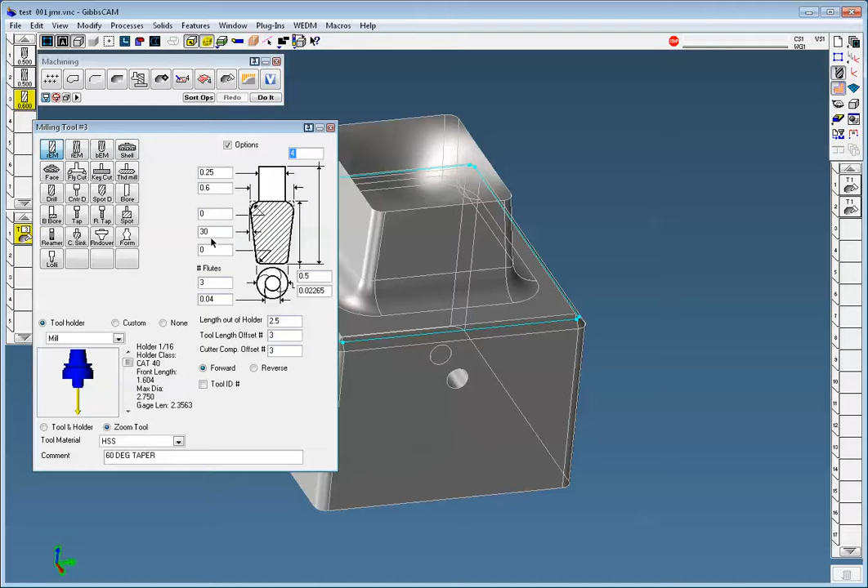What I want to do is use a chamfering tool to finish the chamfer around the lower portion without gouging the top. So to do that, I need a standard 60-degree chamfering tool with a shaft that's long enough to reach down into that part.

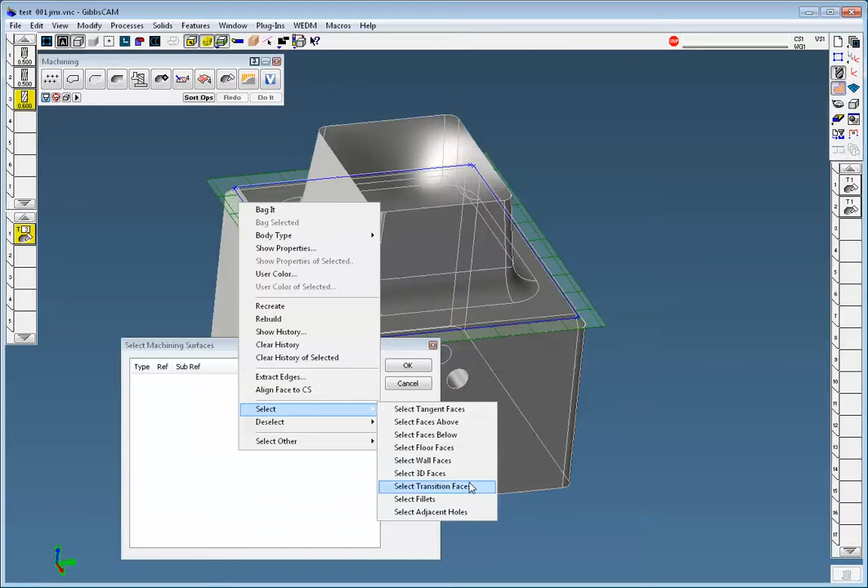So I'm going to open my process panel and say I want to swarf machine. And the surfaces I'm going to pick using our profiler. GibbsCAM's profiler allows us to select that profile, and select the faces with that profiler. I should select all profiles.

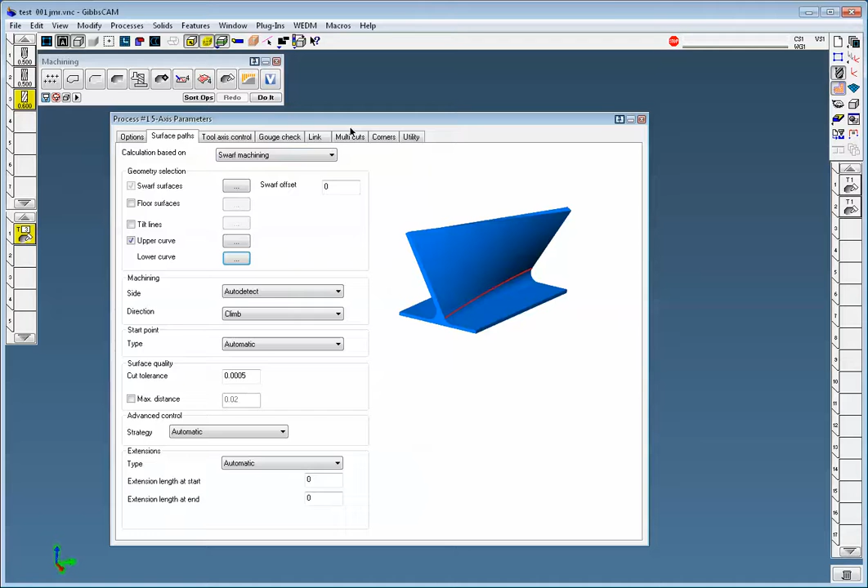Okay, so I have the swarf faces, and I want to machine to the upper curve, and I want to be aware of the lower curve of the chamfer. Once I have those set, assuming that I have my lead in and lead outs set up correctly, and let's make something a little bit less bold. Put a 1/2 inch radius and a 1/2 inch lead in

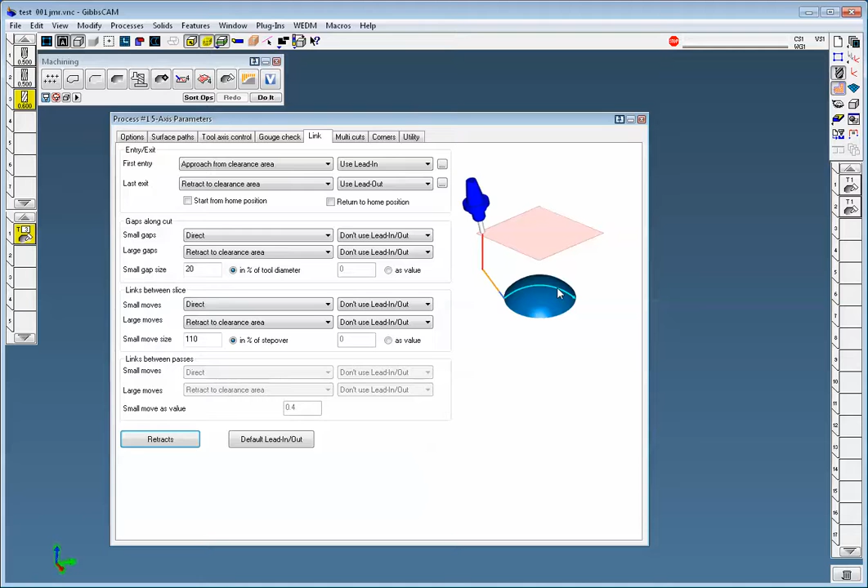line, and I want to retract above the part assembly, which is a good 13 or 14 inches. So with that set, I now can go ahead and say do it. And GibbsCAM will create a way to approach that part and swarf mill it. So the next step will be to prove that out and make sure there's no gouging.

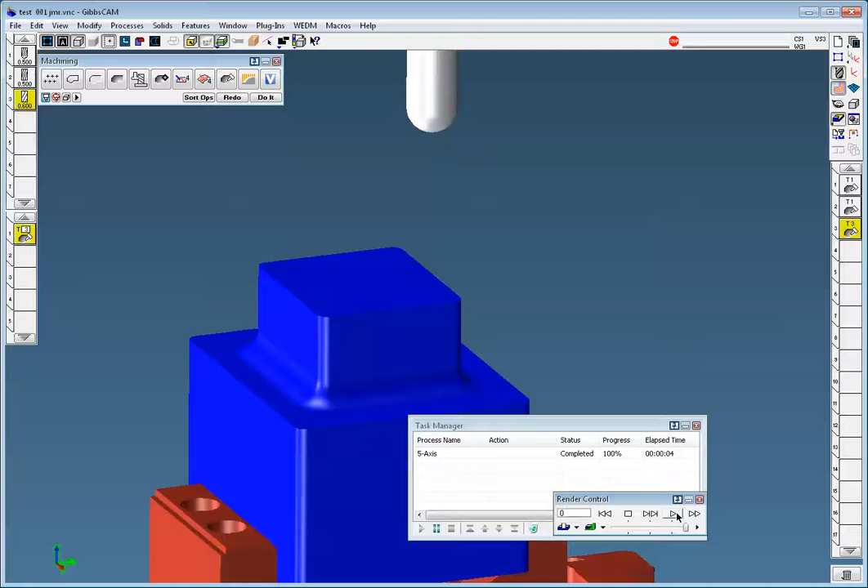I'll rewind and I'll play my cut part render. I'm in the machine sim mode so that it shows true rotary motion on the 5-axis. This particular 5-axis has a rotary tilt table on the base of the machine with a fixed head coming in from the top.

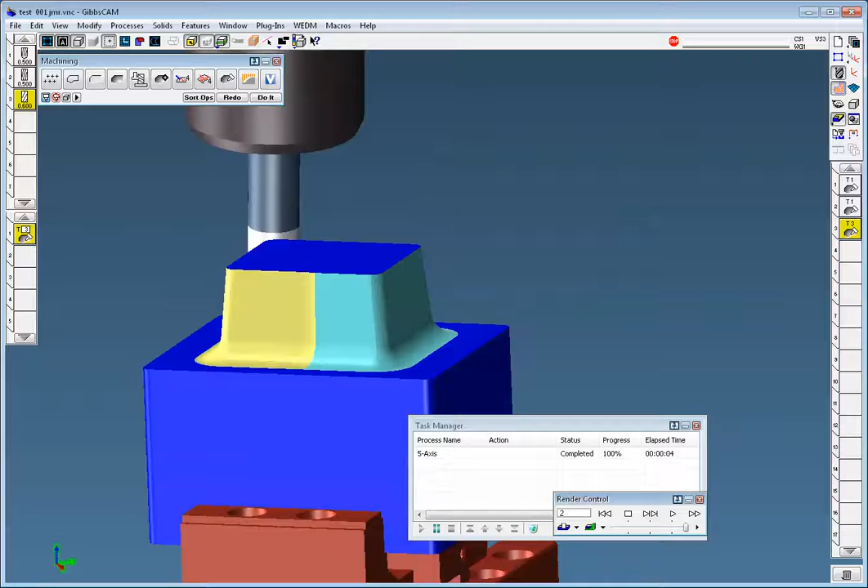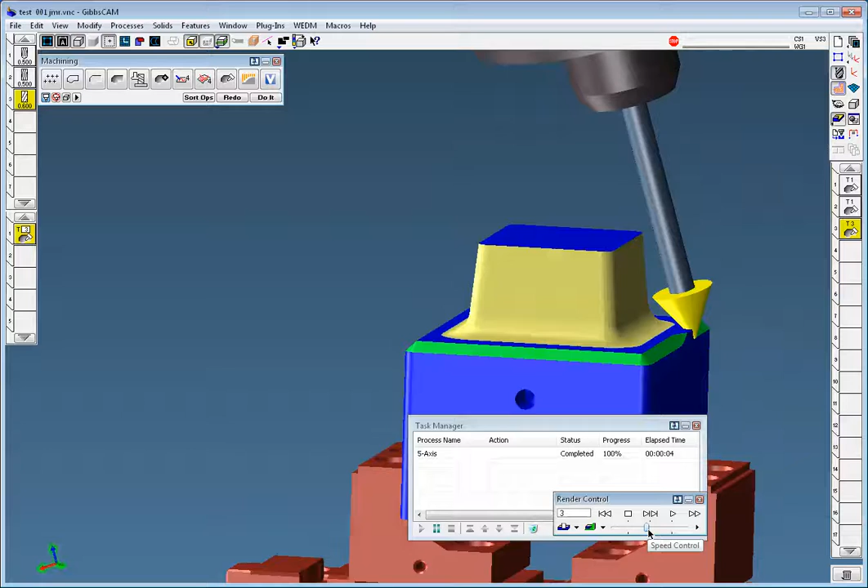So Op 2 is putting a finish pass around with a ball mill, the same ball mill. Now Op 3 is going to use this chamfering tool to come around and chamfer that whole part without hitting the edge. So there you go. There's a nice lead in, lead out, 5-axis chamfering using swarf milling.